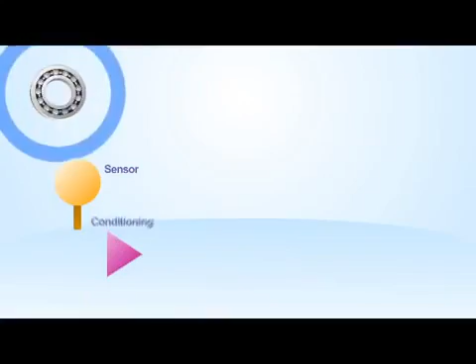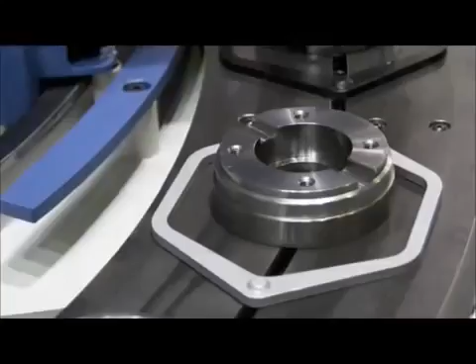Using a sensor to pick up the signal, you can detect this noise, and using signal processing, determine the condition of the bearing. Kittiwake Holroyd's acoustic emission technology has been used on all types of rotating equipment for over 20 years. Using the MHC-Bearing Checker is simple.

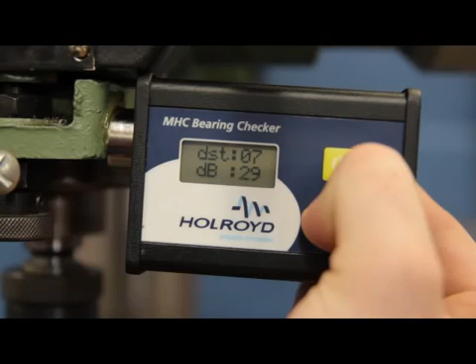With just 2 buttons on the unit and an easy-to-interpret display, measuring the condition of your critical assets' bearings couldn't be simpler. To turn on the MHC-Bearing Checker, push and hold down the power button. To take a reading using the MHC-Bearing Checker, press and hold the measurement button.

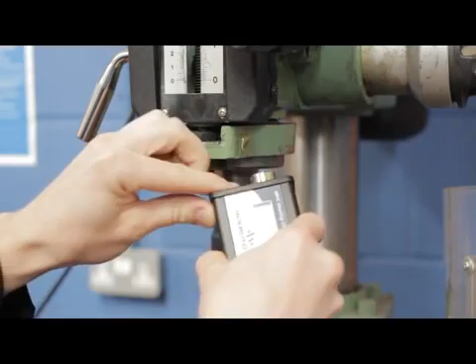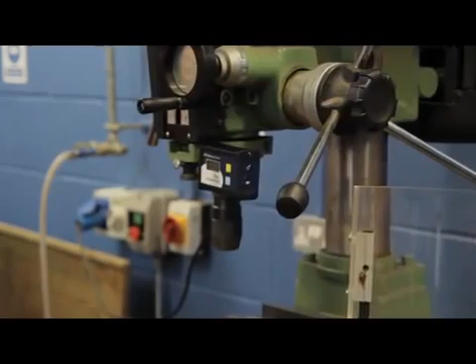This starts a 10-second countdown to attach the unit to the machine using the magnetic sensor head. Orientation of the unit is not critical, as sound waves travel in all planes. However, joints reduce the amount of sound transmitted through a structure. Ideally, select a point on the machine that is as close to the bearing as possible, but with the fewest joints within the sound path.

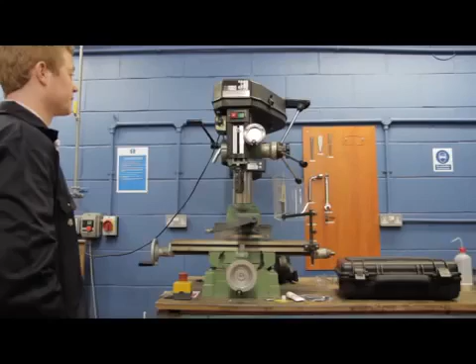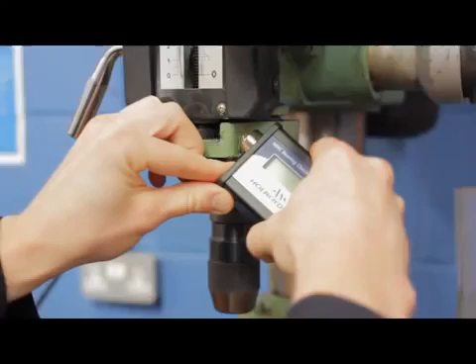The sensor should not be placed on loose covers or guards that are not directly connected to the source of the sound. To take a measurement, apply a small amount of grease to the measurement point to ensure a good audio coupling. Carefully place the sensor on the measurement point at 45 degrees and, using a rolling action, flatten the sensor onto the test pad or location.

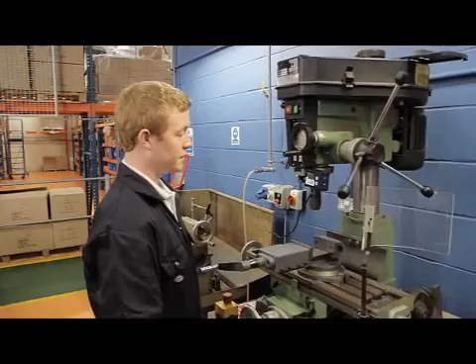Twist the sensor slightly to make sure that good coupling is achieved. Allow the readings on the display to stabilize and then take measurements of distress and decibels. Interpretation of data. The MHC-Bearing Checker provides 2 easy-to-interpret parameters, distress and dB level.

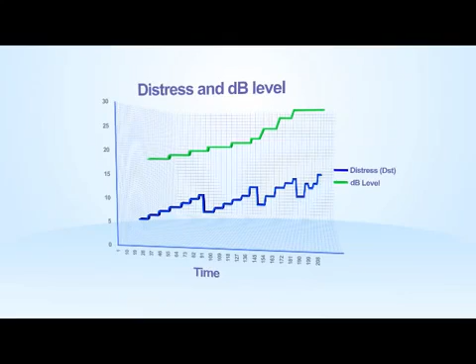Distress is a measurement that quantifies the impacts occurring within the rotating element being measured. Even in brand new bearings, impacts will occur. The base level for distress would be the perfect bearing, which would theoretically have a distress figure of 0. In real life, bearings usually start their lives with a distress value of 2 or 3. During the life of the bearing, this value trends upwards.

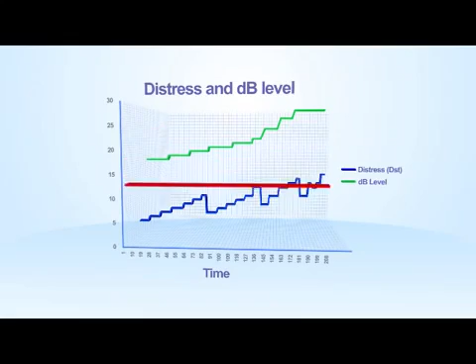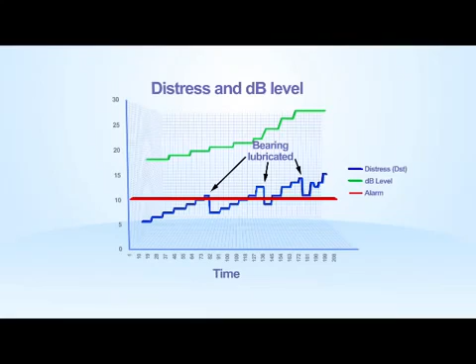Experience over many years has shown that if a bearing shows a distress value in excess of 10, the bearing should be lubricated and the distress value rechecked. If the value of distress remains above 10, then further investigation and possible replacement of the bearing should be considered.

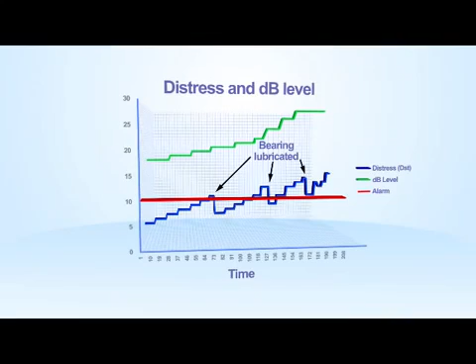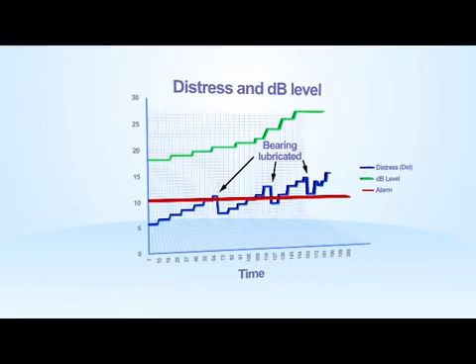dB level quantifies the frictional activity taking place and cannot be easily estimated. The level of decibels is dependent on the speed of the bearing, but only increases as wear increases for the same rotational speed. Usually, the user would take a first reading and trend from that value, or compare it to a similar machine of similar age, doing the same job.

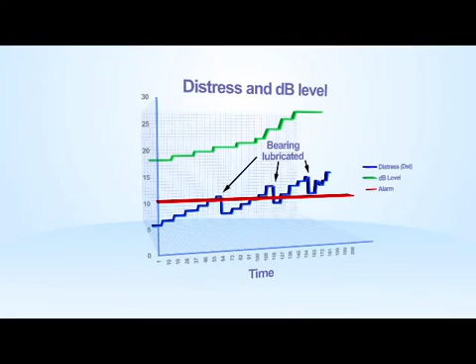By trending this, the user can monitor the speed of degradation. A rapid increase in dB level is normally the final warning prior to bearing failure. As has been shown, using and interpreting the results from the MHC-Bearing Checker is simple.